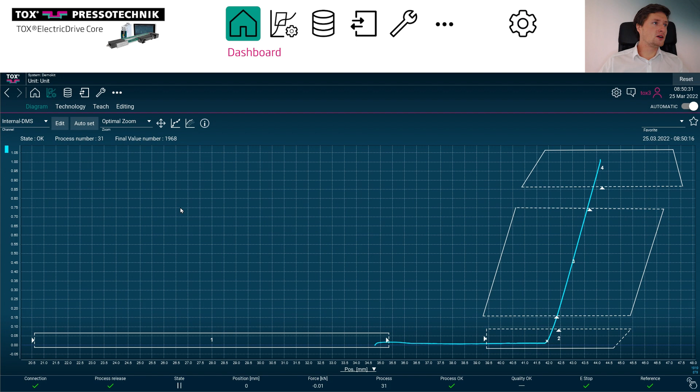To define a zoom, you can click on a graph to open it up and define it, or you can go into diagrams here. Slide to the left, I zoom out, and on the top right, you can define your diagrams here.

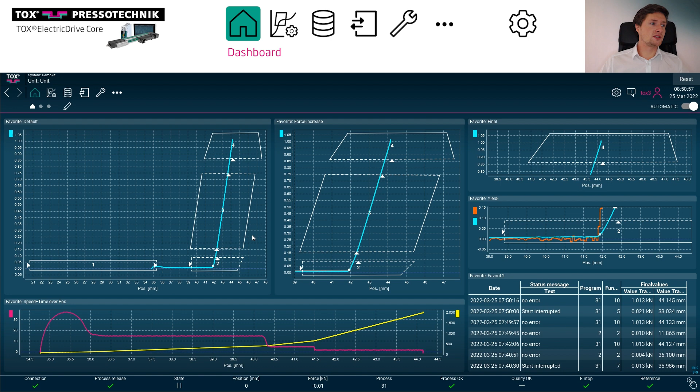I did prepare some other dashboards that I want to show you. So here I have some hot links, my graphs, and some status. And these are basically the same graphs because I only have one unit connected, but you can see they are ordered in a different way.

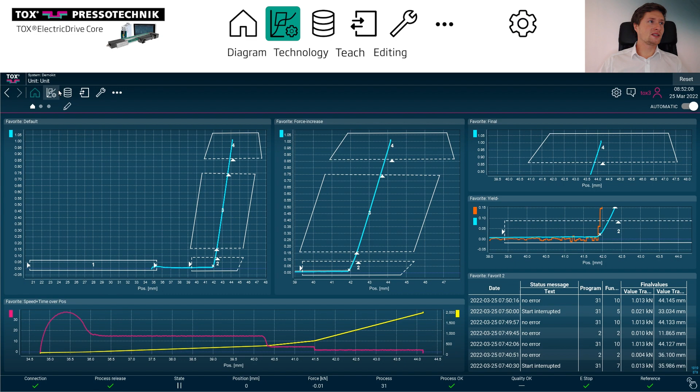Let's continue explaining the processes and diagrams. So in the second icon, I can find diagrams, and here I do have my last executed drive of my press. If I drive again, my curve is updated, and if I drive again, it just continues updating.

So navigating the diagram, you can slide from left to right in order to zoom in. And when you zoom in, you can, for instance, look at your curve and look at one of the 5,000 diagram points.

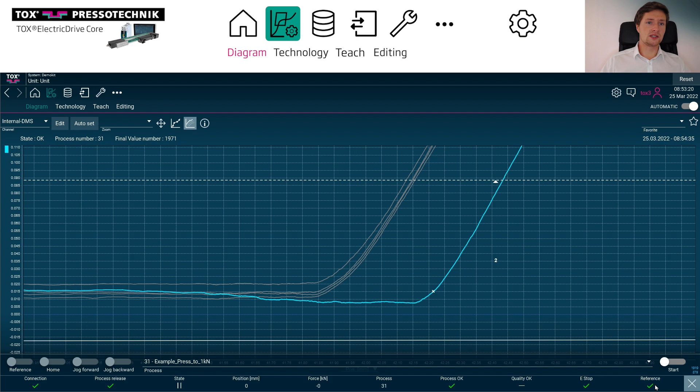You can also display the history, so a trend curve, and you can see it in gray here. If I increase the size a little and drive again, you will see that my curve will move. And I do see my trend history as well displayed in gray.

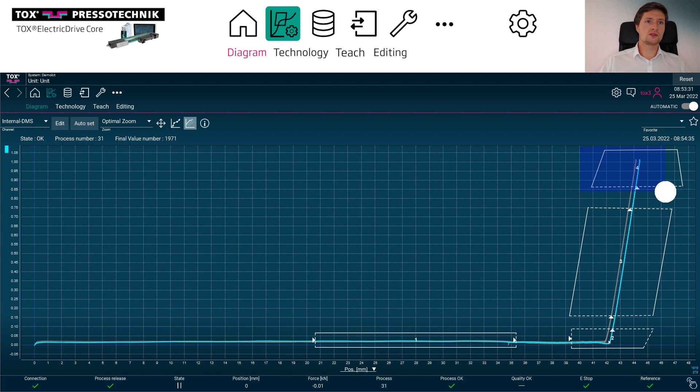On the top right, you can define a favorite, so you can zoom in to a specific zoom and add a new favorite or select one to override.

On top left, you can select the channel you want to display. Please note that I also selected the right unit if I have multiple units connected. Also on top left, you can select which axis and track you want to show. So if I want to show the slope, I can display it on the same axis.

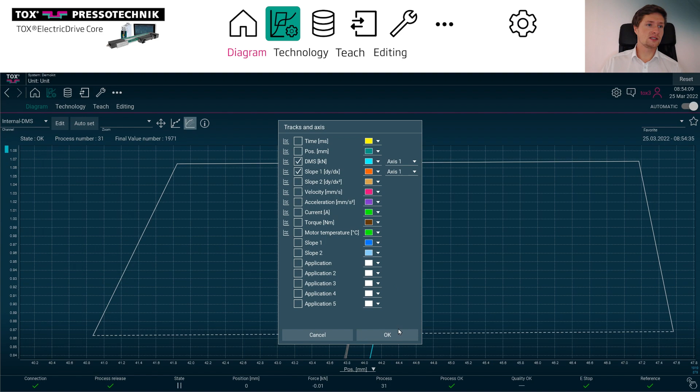To zoom out, you can click your mouse and drag to the left, or you can just click on optimal zoom. Then you can zoom back in and display your orange slope, which is the slope of your force.

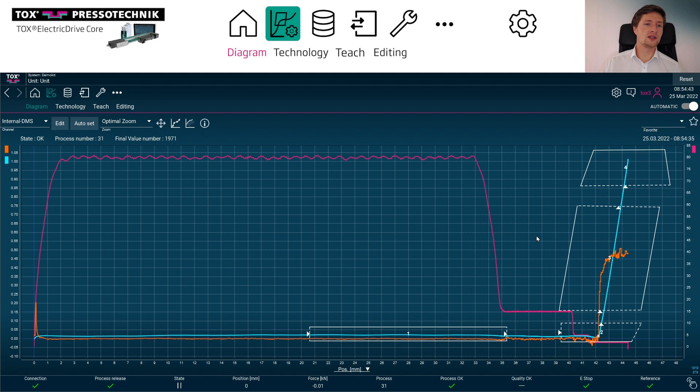Let me disable the trend curves again. I can also display, for instance, the velocity, but let's say I want the velocity on a different axis. So here on the right, I now have a different axis for my velocity. This way you can add multiple things, like I can also display my time on a new axis, and now I populate my diagram more and more.

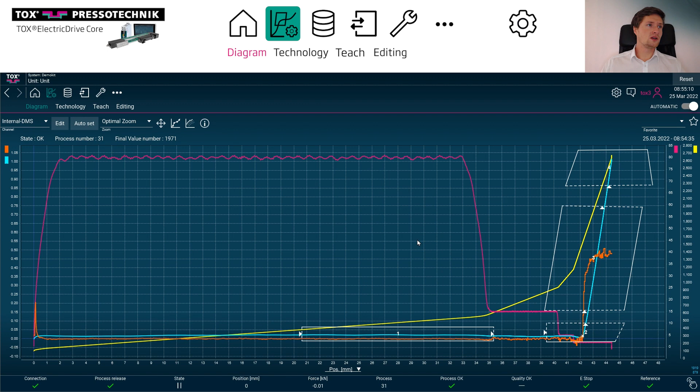I can also save these predefined favorites under a name, and then display this in the dashboard using a widget. Furthermore, you can move your diagram using these controls and move it within the area.

The second window is a technology window. This is where you can see settings of your technology. I will not go into depth on these.

The third one is a teach window. Here you can see the processes that have an envelope curve enabled, and you can teach this envelope curve. One thing is important: you define the number of teach cycles, and once you start teaching, you have to teach all of these cycles, so you need to make sure you have enough components.

You can also teach an envelope using the archive, so archived historic curves, and there you can select the curves and use them to define and teach your envelope.

In the editing mode, you can edit your processes. Here I have my predefined processes, and we were mainly using process number 31 for this demonstration. My process is defined by many process steps, and I can include more steps using the toolbox, standard toolbox, and drag and drop further tools in.

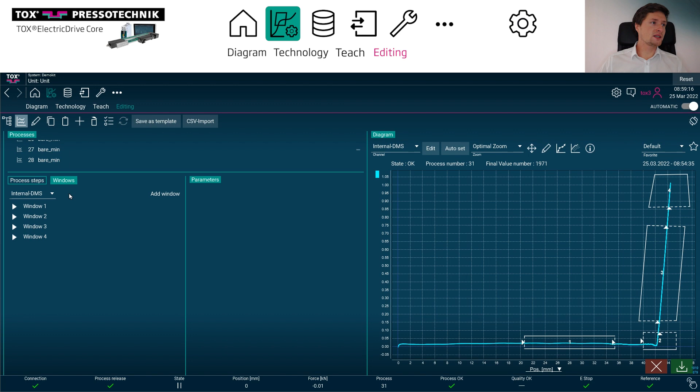Talking about windows, we already have a couple of windows predefined here, and I can select and edit these under the Windows step here. So I can select an ElectricDrive core up to 5 windows.

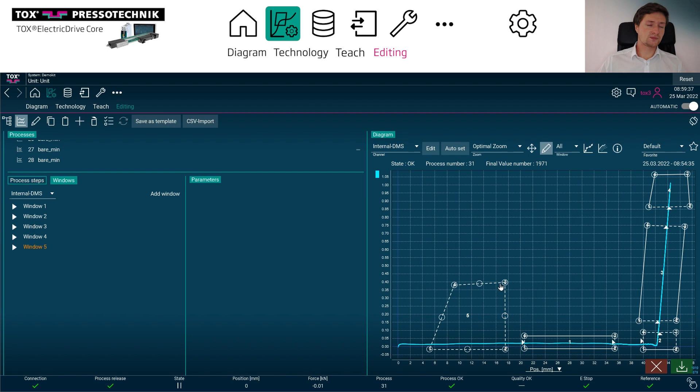I can add a new window, and using the pen I can move it freely in space. I can also move single points, but it's always defined by 4 corners. If I click on a line, I can also prohibit the line from being touched, or if I click twice on it, I can define an entry or exit direction of my curve.

On the bottom right, you can see the store buttons to save your changes. My changes are now overwritten to my power module core, which means the power module core now has the new process instructions. If I disconnect my HMI or laptop from my power module core and drive from PLC, my power module will know the windows and the process supervision.

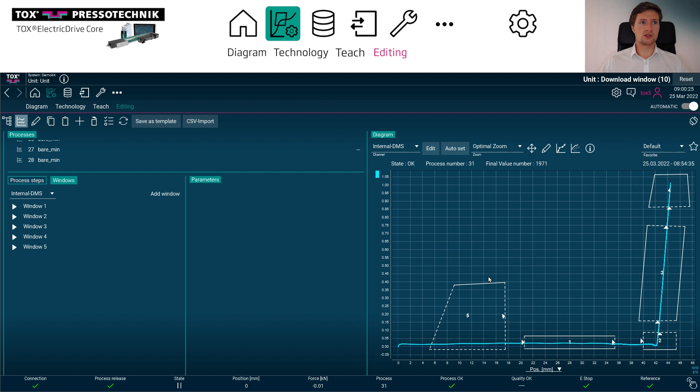Inside my windows, I can also define common parameters, like it must be crossed, or what should happen if the window result is negative or positive.

I can also hard code my window parameters, where each corner is, and define the line properties. I can extend lines as well, maybe to spare another window. I can move my window relative to an event, so independent of position, I can move it depending on

an event like slope detection or another window entry point. I can have common functions to supervise my process, like a mean calculation, an average of my y value, a time supervision. I can have a math function, like a yield point, digital input, turning point, integral, and so on.

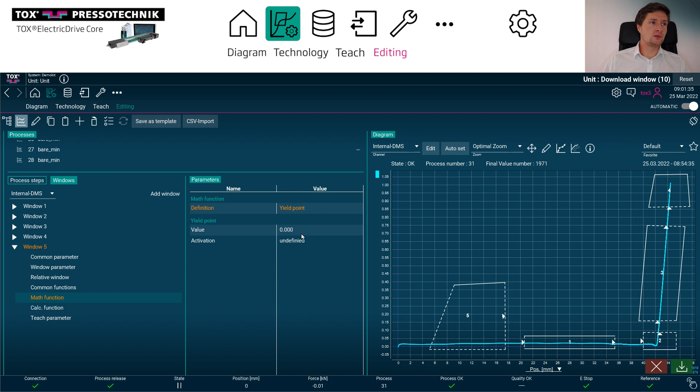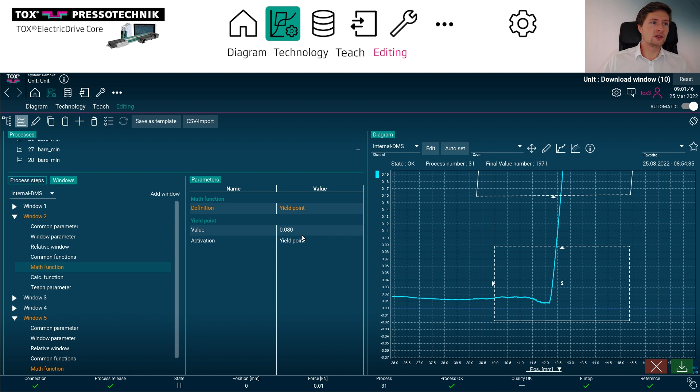For many of these, like the yield point, the slope is actually important. So if I look on window number 2, and go to the math function of window number 2, I want to detect a yield point here, and therefore I look at my slope. Let me add it to the graph, and you can see my slope, the orange curve, jumping up as soon as I hit a spring.

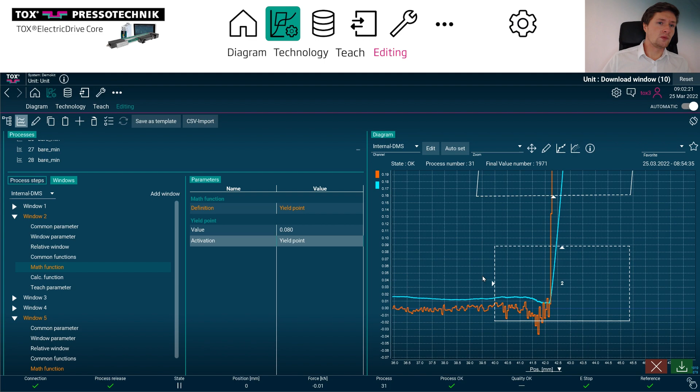When I save this and look at my diagram and drive, here you see a small X marked where the yield point is, or in my window results screen. You can manually load them, and in window number 2 you can see where my yield point was.

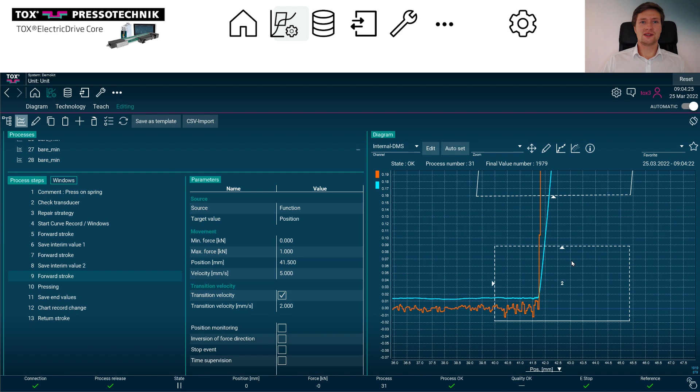Alright, that was it for the second part about the processes. Now I want to show you the messages and what you can see behind the third icon in your TOX software. First, the diagnosis is mainly where you can see your error messages and some information.

Then you can filter the information type as well as the date. With the eye icon, you can always filter what columns you want to show and hide in your overview. If you click on one, you can also get some details, or you can jump to it right away.

You can also search, for example, for a unit number, a status number, or a date and time. If you click jump to, you will jump right to the curve that actually provoked this error message. So if I click jump to, I get my archive showing the curve that provoked this error message.

Continuing on the archive, you see your curves here, and you can refresh the archive, and select a curve that you want to display. All of these can be changed in size.

You can also select what you want to show in the columns. And on the right, you see the actual detailed information of your curve.

You can use the diagram on the bottom right, just like in the diagram window, so you can edit the tracks you want to display on different curves, maybe a different track on a different axis, and you have all the information that is taken.

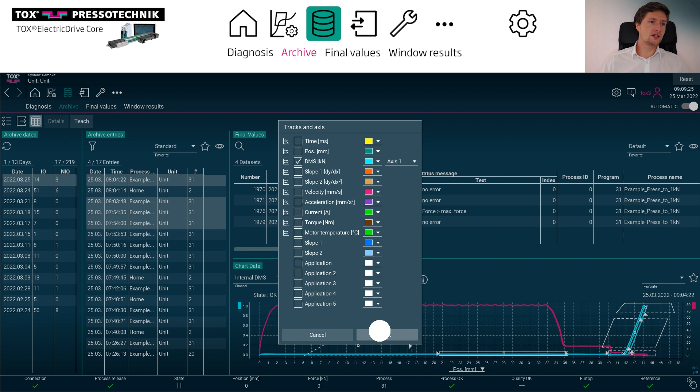You can also select multiple curves at once. Let me disable the velocity again. And now you see multiple curves displayed on top of each other.

You can export them easily using this button and select what you want to export and how, either in CSV or XML. But for bigger quality exports, you probably want to set up a quality report, which you do in the settings, export settings, and this is where you can add quality exports.

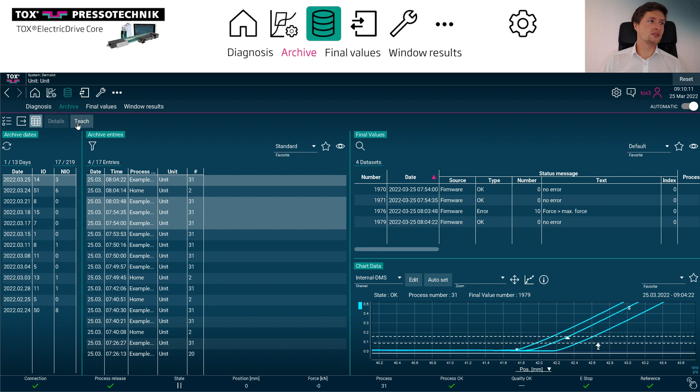If you have a curve with envelope detection enabled, you can use the teach function to teach those and use it as data to calculate where your envelope should be.

You can also filter your archive, being either only OK or not OK curves. And you can also enter filter text. This is a free window where you can, for example, put in a process number. And you can also select from what time to what time your filter should apply.

The last two screens we have are the final values that I can manually or automatically load. And here you can see final values. Please note, you can only see a final value if your process has the function, the process step, save end values.

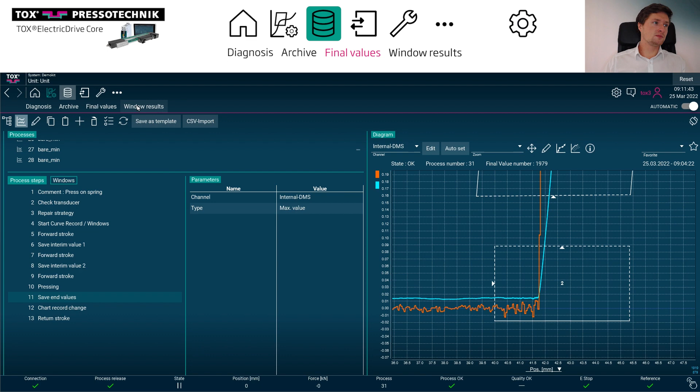Type maximum value, only those are displayed in your final values screen. You can also see a status message, and again you can select what columns you want to see, maybe also the intermediate values, and you can store it as a favorite.

The favorite again you can use as a widget on your dashboard. You can also search here for specific search terms and this way filter your list.

Same applies for the window results. Here you can also select the columns you want to show, save it as a favorite, include it in your dashboard, and you can manually load or select an automatic load.

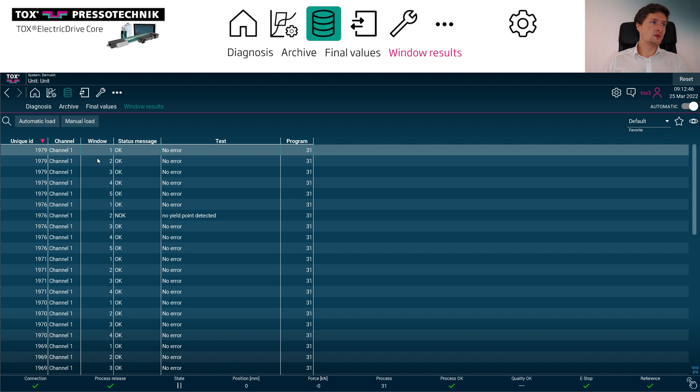Here you can see a unique ID that can also be a part ID transferred via the PLC, the channel number, and the window number. If you double click on it, you get more detailed information like an overview, the entry and exit points, as well as an evaluation, whatever you have defined in your window. Please note, all of these values you can also transmit via the Fieldbus to your PLC.

Next, I want to show you the in and outputs. In the in and output screen, you can see Fieldbus inputs and outputs, where you can see an overview of your Fieldbus. It's divided between inputs to your left and outputs to your right.

And then it is explained as in the documentation, the TOX fixed table, the customer fixed table, which together stand for 10 words. And then you have the switching table that is fully customizable, both in and output. So you can see what you currently have on your Fieldbus. And you can pop these open and see a green light for a high, and a gray one if it's low. So if I run my process, these will change because my output on the Fieldbus will change.

This is very handy to see what you have on your Fieldbus and if your communication is working and what is actually communicated. It's also handy to troubleshoot your Fieldbus status.

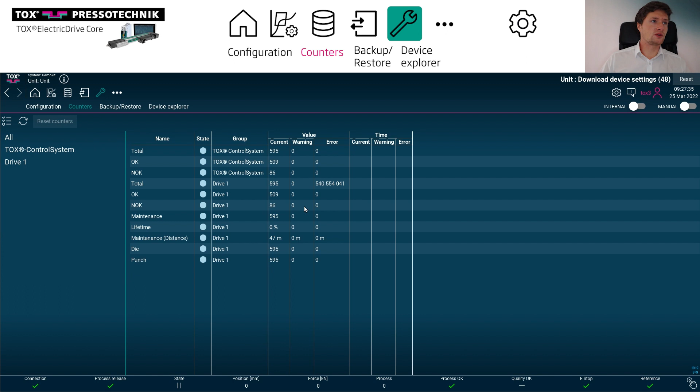Also, on the channel icon, you can set up the filters of your velocity, slope, and the grid for sampling. There's tool data you can edit, and accessories you can edit here. Furthermore, you have a counter in value as well as in distance.

There's a backup and restore function, so you can set up an automated backup in the settings, but you can also edit a new backup here and backup manually. You can also restore from backup.

If you've used our previous TOX software, you may remember that there used to be different software like the works, the HMI config, the server, and so on. If you like to use the works, this is somehow what we show in our device explorer. So this is simply my live environment. If I'm connected to my drive, I see all the data that is on my drive, as well as all the process information live on my drive.

Offline, I do see my adapters that I have stored under CTOX3 offline. And the unit is what is always copied and kept updated with my control system. If I want to show both of them, I can display them this way. Show processes here. Now I select the other one, show processes here, and I can compare things like my repair strategy. Look at my return stroke. Okay, it's good. All right, and then I can use this to compare.

You can also look at the Fieldbus, and here you see a couple of columns. One is the TOX fixed table that you cannot modify, customer fixed table where you can edit a couple of bits, and the switching table. So in the switching table, you can switch on up to 16 pages from 0 to 15. And if a page is empty, you can populate it with any of the parameters on the left. So the left is like a toolbox.

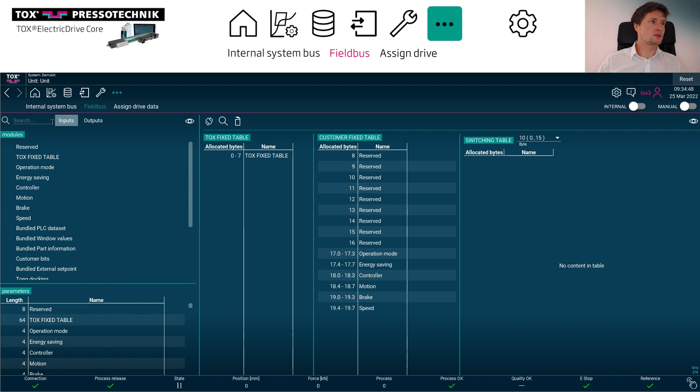You can select in the toolbox between input and output. And you do have a search bar. Let's search for final values. And then I see a couple of parameters that I can drag and drop to my switching table. And you directly see what byte is allocated now with these parameters. When you save it, information is updated to your power module core. I want to discard my changes here.

Also, you can assign drive data. This is something you probably don't need to use, but you can show here again different columns, save them as a favorite, and see some drive data, mainly for if you have a tool, and this is something that you use for TOX clinching processes. That was it about the other information and other settings. And now I want to show you the last icon, which is the settings icon.

In the settings field, you have some general settings like the language. Please pay attention, this is where you need to restart your software. You can have an automatic user logout. And there's some general basic settings, which are mostly self-explanatory.